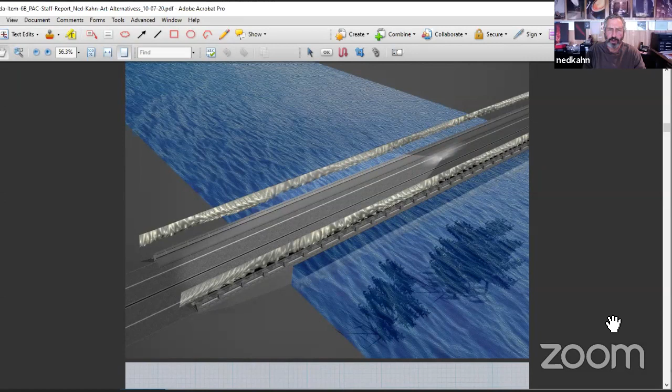So there's an aerial view. One of the things I should point out is that I put this kinetic curtain up high enough that when you're driving on the bridge, you look right through the vertical. So it doesn't block the view of the landscape going by. If you're a pedestrian on the bridge, it doesn't block your view either—it's essentially above your head.

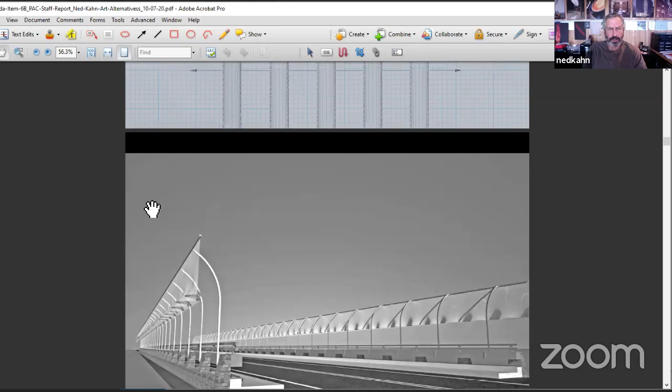So the Caltrans gauntlet—basically the question today is, do you guys think this is a good idea? If so, the next stage would be taking it back to Caltrans. Caltrans, as Kenyon and I learned the hard way, make up the rules as they go along. There's no oversight on them—they can just change the rules, and we witnessed that multiple times.

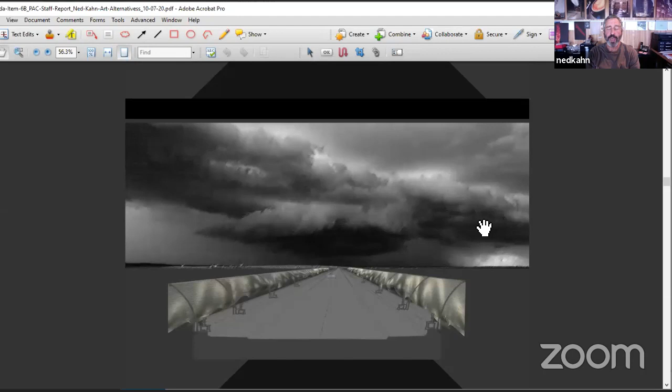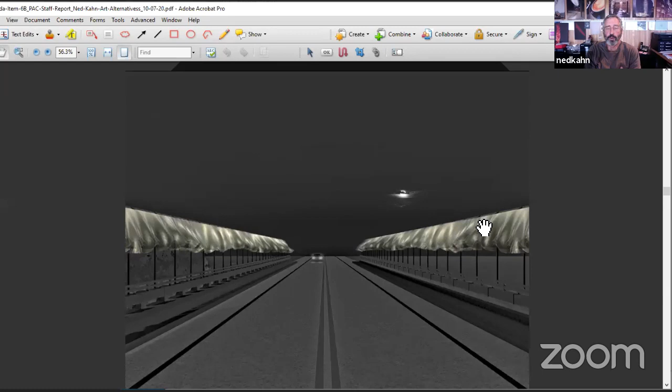What I think this design has going for it is that it uses the exact same materials they approved last time—it just changes the orientation. And it places the kinetic surface much farther away from the roadway than before, with those two vertical columns. So my hope is Caltrans might be good with this, but again, it's a very arbitrary process.

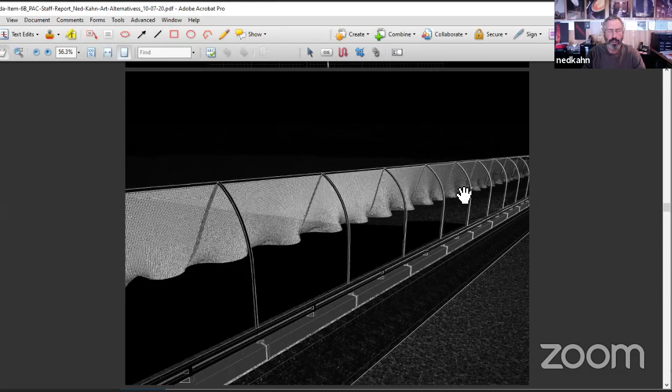With that, the other thing I should add is Warren, in his revision to your minutes, mentioned the temporary sculpture garden I'm doing at the site of where the new Hotel Sebastopol will eventually be. They're giving me the property for a year or two, depending on how long it takes them to get their funding happening again. We're getting ready to install a series of pieces there.

There's a local funder helping fund that project who's super excited about it. If you guys are good with this design revision, besides going through the Caltrans gauntlet, I'd like to propose it to them. I think it's the kind of thing they'd be super excited about funding.

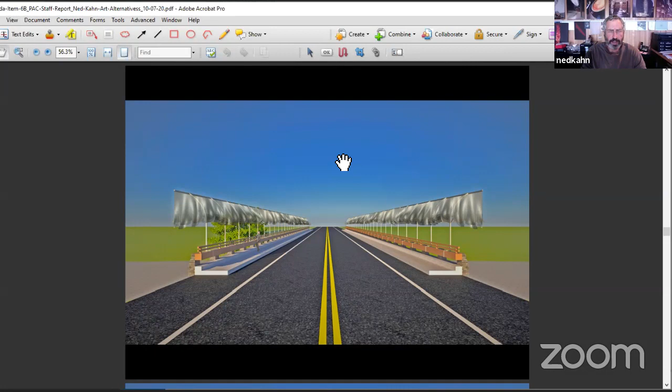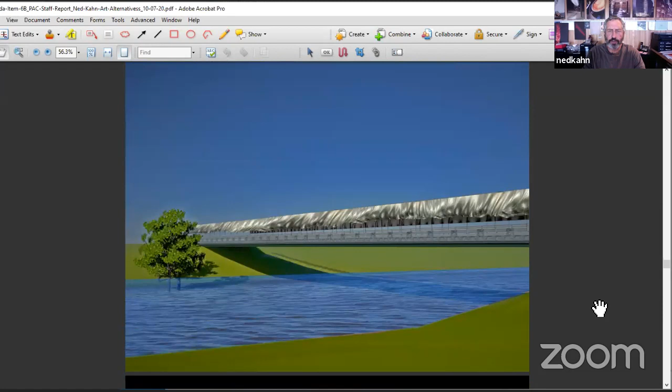They're a husband and wife who fund all kinds of environmental education things, art projects. They're funding my sculpture garden there, and potentially funding moving that sculpture garden to the site of what used to be called Ocean Song out on Coleman Valley Road, as a permanent location after its run in Sebastopol.

So if you guys are into this, I'll take it back to Caltrans. I have a relationship with David Ng, who's been our main portal interface. I could informally show him this and ask what they think, or we could do a more formal presentation back to them with the revised proposal. So with that, questions, comments, other things from you guys?

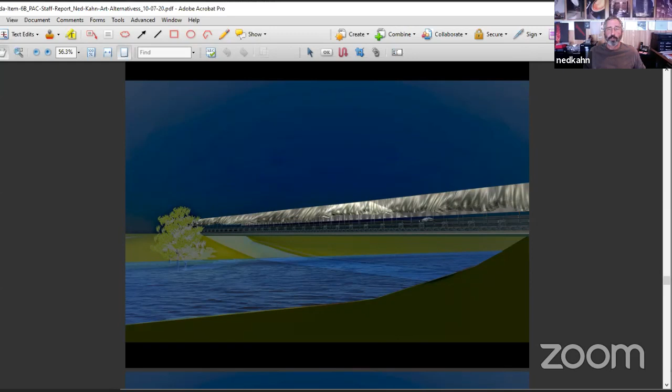Now, did you want me to show the video? It's about a minute long, so not long. See if that works over the Zoom. Yeah, the video is worth a thousand words. Let's try it.

And Ned, this is the actual installation in Columbus? Yeah, this is a real, unmessed-with video. As you can see, it's a super minimalist, brutal concrete parking structure, and it's the main view people driving on the freeway or coming from downtown Columbus see of the convention center. So they came to me and said, please help mitigate this thing we've built.

So these are about 10-foot tall curtains—there are three of them, about 120 feet long. What I proposed for the bridge in Sebastopol would be half the height, 5 feet tall, but almost three times the length—300 feet long, which is the concrete part of the bridge that spans the water. You can see from the video that the bottom half of these curtains is the most active part, so making them half the height doesn't diminish the dynamic movement.

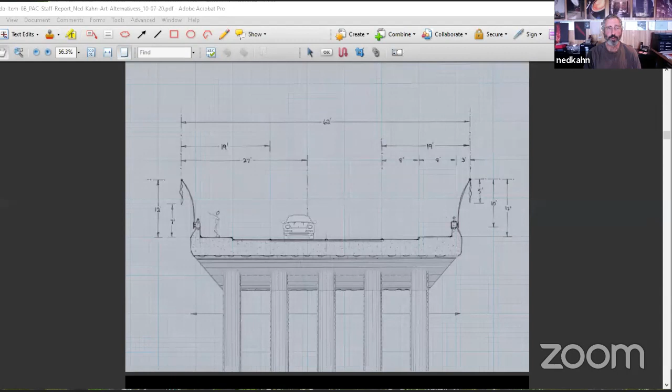That a big gust of wind would come and flip the thing over, but I haven't witnessed it happening. There's so much porosity of the fabric that it doesn't act as much of a sail to flip over. Also, the fabric is 50% open. In some of the renderings I did, it kind of looks like it's 100%, but it's actually more of a scrim, more like a net. So as you're driving, even where the fabric is, you're looking right through it.

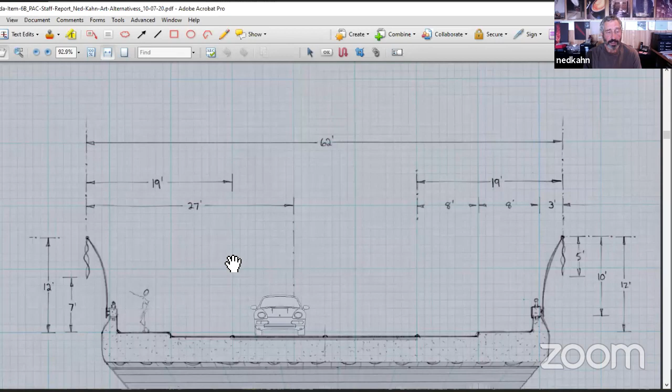One of the earlier iterations of this long process was, some public comment said, oh, we don't want to obscure the view of the landscape there. So I really tried to be respectful of that, and it leaves a whole section unfettered. Then the rest of it is 50%, so you can really see through it.

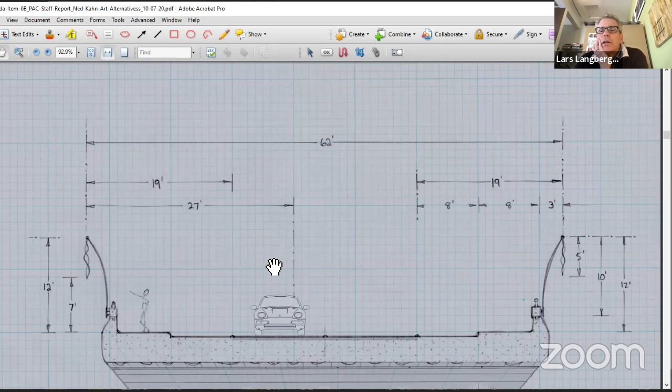Okay, no, that's great. I think I like it even more in some ways than the other one. When Caltrans put those piers in, I'm sure a lot of people were just imagining the entrance to Willits or Camp Meeker with a big sign going across the roadway. This sort of subverts that. It gives this incredible strong presence to the entrance of the town, but does it in a very different way, which I really like.

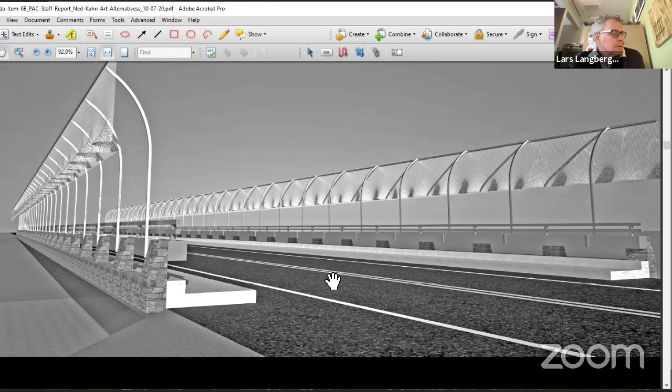So the only other comment I would have is, given your lovely lengthy experience with Caltrans, going to them sooner and simpler is probably best, just to try and get an initial yes, this can work, so you don't have to spend tons of time at it. I know in general Caltrans has guidelines for treating state highways that go through small towns very differently than an interstate highway. So appealing to that part of Caltrans that does think about things that way is always, to me, a good card to play. But those are my only comments.

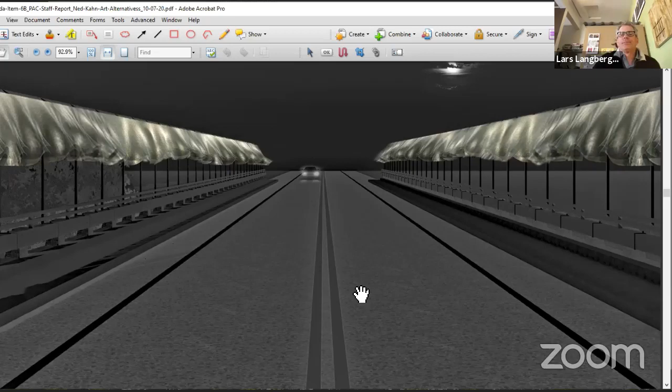Hi, Ned. I'm Ari. Thank you for coming back and working so hard on this. I really want us to be able to have a piece of your sculpture for the town. And it's a little hard for me to fully visualize and feel what this would be, and therefore it brings up some concerns.

Jeff called it a ceilingless tunnel. And so I just want to say what my concerns are, and I'm hoping they'll be dispelled. So it did feel to me like it makes a tunnel for people to enter the city with, which is enclosed. The fact that we can see through it might help that.

I'm concerned that the most people who will see it will be the drivers. The visions, the images from other perspectives are beautiful. And I'm thinking about what it's going to be like as a driver going across that - a lot of movement. And yes, I understand it's above, but I'm wondering about that. And also that there are people who are sensitive to flickering lights, and cars driving, when a car passes you, that's one thing to deal with.

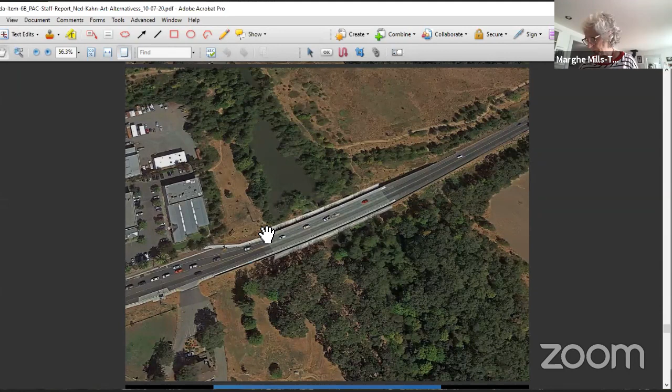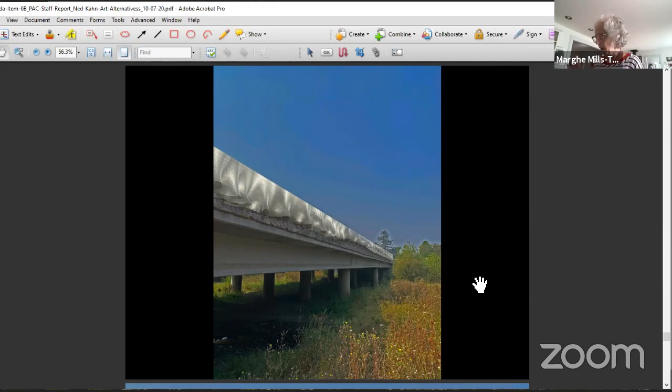So I understand that this is more visualizing the wind, as you said. The initial thing you created, which probably we have to let go of, but also reflected visually, which was very beautiful, the nature around it. I'm wondering about, and I don't know if this would work at all, but maybe have these curtains in the first section of the tunnel - excuse me, of the bridge. Maybe the first 5 sections or something, some sort of way of making it not so much a tunnel.

So those are my concerns. And as I say, I really do want us to have something of yours as a city public art. And I really appreciate all the work - I know that's an astounding amount of effort, and I really appreciate that.

Thank you. Well, I've never sort of imagined it feeling like a tunnel. I imagined it more like an environment that you enter and you pass through. So just in my experience of the 100+ commissions I've done over the years, the ones that have been more of an environment, an immersive environment, have been so much more successful than the ones that are kind of more like a freestanding sculpture.

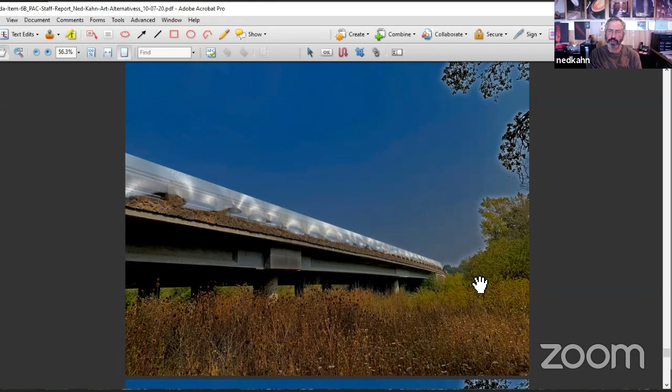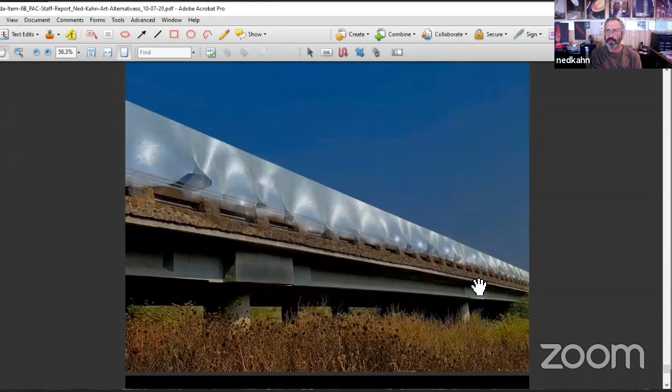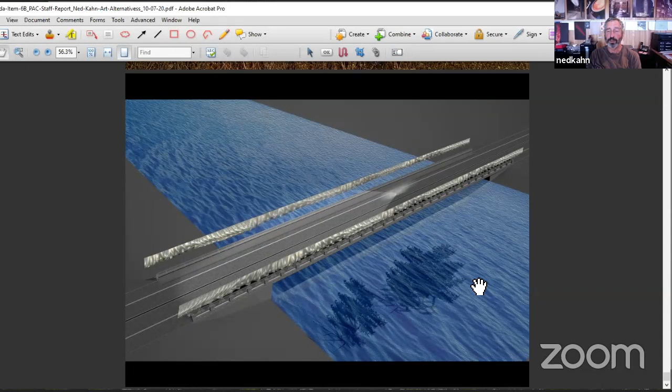And so that was part of my thinking. Part of my thinking was also that the bridge, as it currently is, is so boring, and you don't even realize it's a bridge. It's just like an extension of Highway 12. And so when you actually go underneath the bridge, it's kind of an amazing structure. And so I really wanted to kind of celebrate the fact that this is a bridge. Most people are barely aware of that, except when the Laguna really floods - then it becomes obvious.

So I was intrigued with the whole idea, and this image that you're looking at kind of captures that. You have the Laguna kind of flowing perpendicular to the bridge. So the idea of a bridge that's kind of a fluid bridge, that has its energy field perpendicular to the natural field - I think it's a really powerful, kind of minimalist idea.

The flickering panels - I mean, the piece that I mentioned at the parking structure in Columbus, which we just finished a few months ago, is right next to a super busy freeway. It's the equivalent of 101, so there's just a million cars driving across, and that parking structure is like a couple hundred yards from that freeway, and it gets hit by direct sunlight, and it gets illuminated by car lights, and it's been zero complaints or issues.

The piece in Los Angeles is not next to a super busy road, but it's a pretty busy road, and that's been up for many, many years. There's people's apartments right next door to it - a bunch of people's fancy, expensive condos look right at it. There's been zero complaints or issues, and that gets full sunlight, and it's a couple miles from the ocean, so it's very windy there.

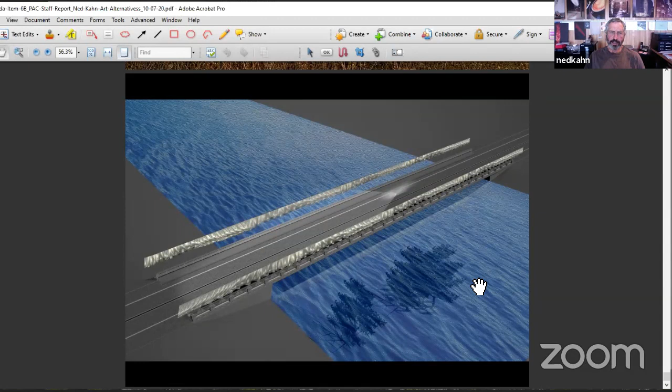So as far as sound, I know you asked about sound - it's amazingly silent. When it's crazy super windy, you might hear a little bit of a whistling sound going through the fabric, but you'd have to stand right next to it to hear that. So it's essentially silent. And what else did you ask me that I'm forgetting?

Well, there was the lights, and I'm glad to hear about the sound. That's great. And one thing I did forget to ask you about, which I'd like to add, just so the...

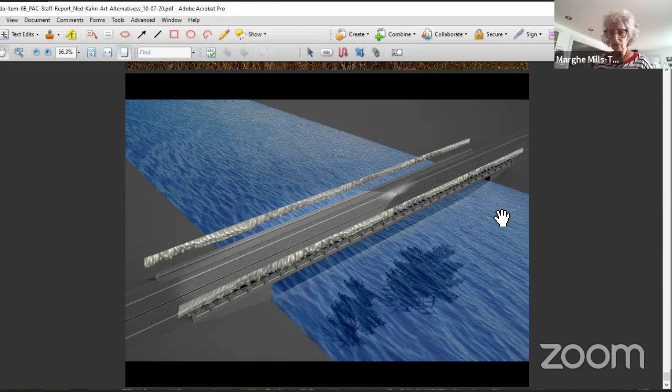Other thing I was wondering about was like, so there are these regular beams along the whole bridge. And so again, most people who will see it will be moving in a car, and just those beams - so it adds that kind of movement that you're passing beam after beam.

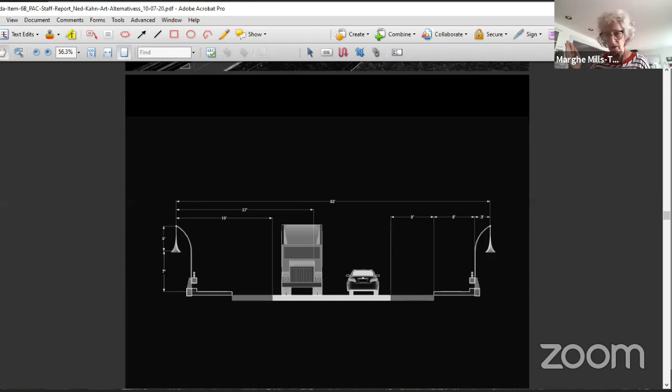It's kind of like when we pass a section that has wires on posts, telephone wires or so on, and there's that regularity. So that was one thing I was wondering about. And then I had another thought, which was some way to make it not as enclosing, not constantly the same, would be to have a curve, either in the vertical plane or in the horizontal plane. So maybe it would go up a little at some point along the bridge and then down. I don't suppose it could go out, but maybe, so that's another thought.

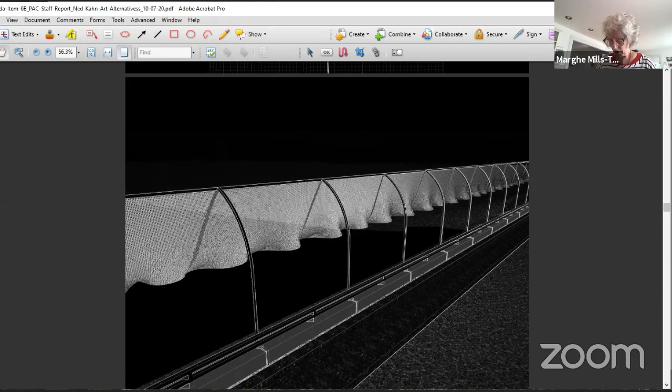Yeah, I hear what you're saying about liking movement in the environment. I just want to have a clear and comfortable sense of the environment this would create for drivers.

Well, a couple things I'll add to what I said before. One is, one of the things I would say to Caltrans is it would be very easy and economical for us to fabricate one section of this, and it just clamps to the concrete column. So we could put up a test panel, like a 20-foot long panel with two clamps, kind of two of those curved beams you're looking at in that image, and do it on each side, and shoot a video of it, and shoot a video of what it looks like with a car driving through there.

That could be something we just clamp in place, shoot the video, take it down. You guys could all come look at it, and Caltrans could come look at it. So instead of it being theoretical, let's actually do a real experiment and show them that it's a totally benign thing. So that was one thing.

I had similar thoughts to what you mentioned about introducing a curve to it. I did some drawings of just what you described, kind of having it lift up in the center and come back down. I also did some drawings of having it not be parallel to the bridge, to kind of push out in the center. I didn't like them, and I came back to a simpler version.

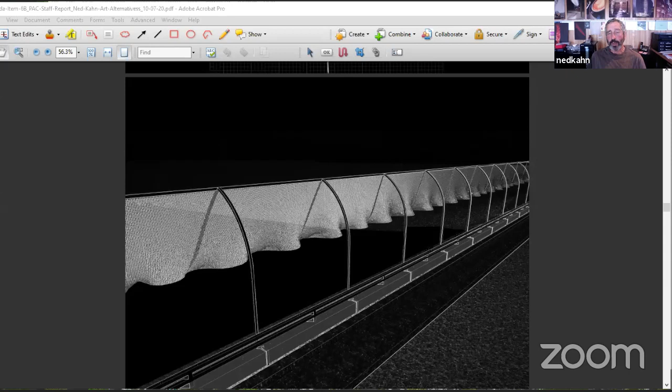One thing I should point out is the bridge has a subtle arc to it, so it does have a high point in the center. The idea I proposed in these renderings is that the artwork follows the bridge, so it will have a subtle rise in the center. You'll mostly be aware of it when you look at the bridge from the side, and the views from the parkland underneath the bridge are actually going to be amazing.

That little park at the southwest corner of the bridge, Tomodachi Park, is a beautiful place. You go into that park and have a beautiful view of the side of the bridge. During the times of year when it's not underwater, it's a beautiful place to hang out, and since you're underneath the freeway, you don't have all the sound of the cars imposing on you, so it's actually a relatively peaceful place.

Similarly, at the opposite end of the bridge, the northeast corner, there's a little trail, a trailhead next to the Chevron station, that goes all along the Laguna and other places, but there's a little spur of that trail that takes you down to the bridge, and that's another beautiful place to hang out. So I thought about putting a bench, or a series of benches there, and a series of benches in the opposite corner, to make a place that encourages people to sit and have a more peaceful experience than the one you'd have walking or driving across the bridge.

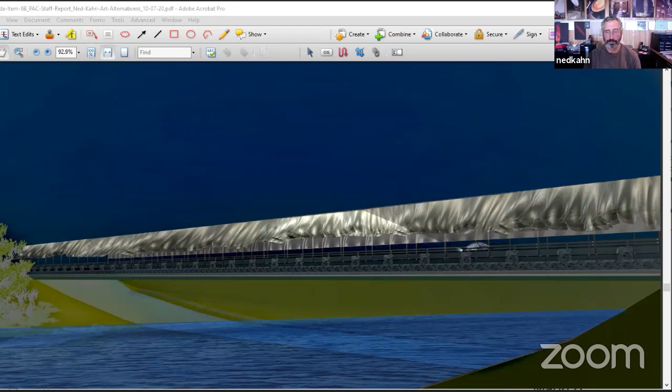And one last thing - you're going to clamp these to the part of the bridge. Don't you think we're also going to have to go through some engineering steps as well to have that approved? You just think it's going to be a Caltrans thing and we can go in there and attach whatever we want to the bridge?

No. So I already ran it by my engineers - Endrestudio, Paul Endres and his partner Dave Campbell, they're based in Emeryville. Caltrans, as we learned from the last multiple iterations, they don't want to engineer this. They want us to engineer it. So basically if you go back to them with a stamped drawing from my engineers, they're like, yeah fine, that's great. That's as far as they care about it.

So yeah, I ran it by my engineers. As soon as I had the idea, I asked is this structurally workable? And they're like, oh yeah, that thing's massive. They said that thing is designed to stop trucks from crashing into the Laguna. Even if it wasn't attached to the bridge, just the weight of that concrete beam alone would hold this thing up - it's not dependent on its structural connection to the bridge itself. So they said this is way, way easier, and they basically said whenever you're ready, we'll stamp your drawings for you.